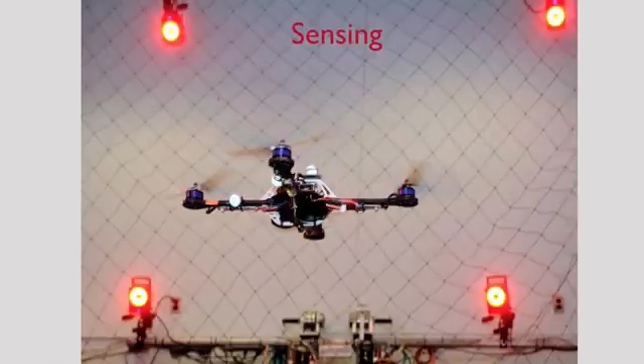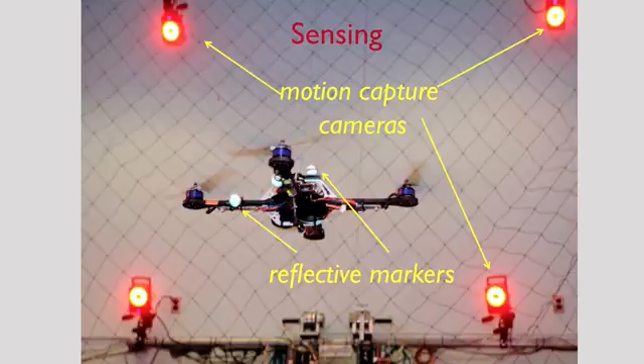In the lab, we have motion capture cameras that allow the robot to measure its position. Through reflective markers mounted on the robot, the cameras can estimate the position of each marker at speeds exceeding 100 to 200 times a second. These measurements are incredibly precise, with accuracies well below 1 millimeter.

If you go outdoors in general, you might not have GPS, or your estimates of position from GPS can be very inaccurate. This is especially true next to tall buildings. Indoors, it's hard to get GPS, and we'd like to operate both indoors and outdoors. Because these vehicles are small and maneuverable, they can find themselves in settings where it's very difficult to communicate directly with them. We also want these vehicles to move quickly and maneuver through complex environments.

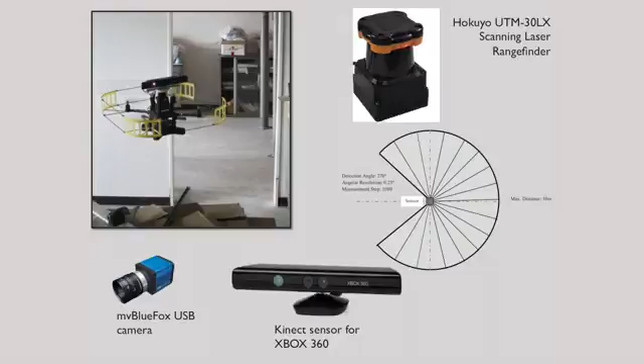How do we navigate without GPS, without external motion capture cameras, or any other external sensors? Imagine the vehicle is equipped with sensors such as cameras, color plus depth cameras, or laser range finders. These sensors allow the vehicle to infer information about the environment, and from this information, localize itself.

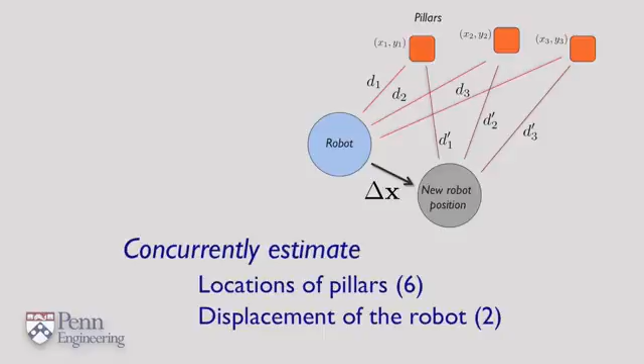If you think about it, you're trying to estimate 8 variables: 3 pairs of xy coordinates for the pillars, and delta x. This problem is referred to as simultaneous localization and mapping, or simply SLAM. The idea is you're trying to localize yourself, estimate delta x, while mapping the pillars x1, y1, x2, y2, and x3, y3.

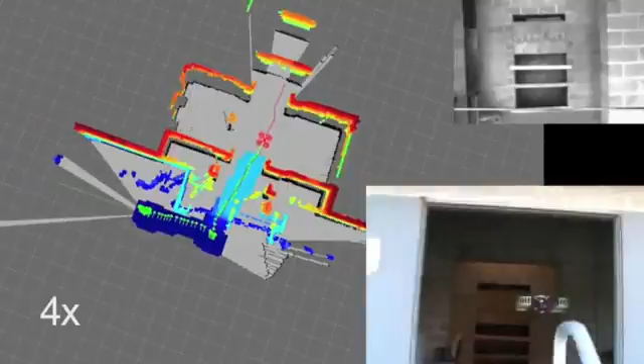In this video, you will see a robot entering a building it hasn't seen before. It uses the SLAM methodology to map the three-dimensional building while estimating its location relative to the features in the building. The map it's building is shown on the central screen. The blue colors are the ground floor and the red colors are the top floor. You will see intermediate points where the vehicle plans its trajectory.

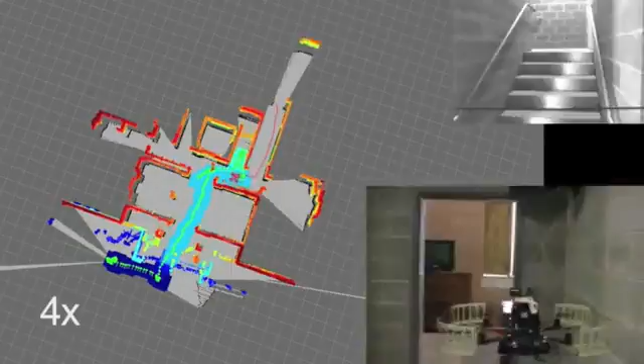If you look at the red snaking curve that emanates from the vehicle to goal points, these goal points have been designated by an operator viewing this map and tasking the vehicle. The vehicle does everything else. In other words, you can click and point your way through this building without entering it, while getting information about what's inside.

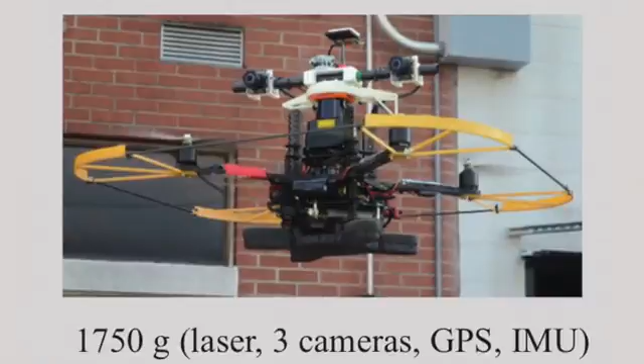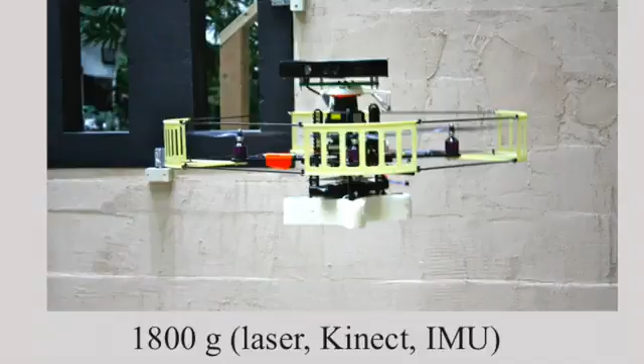On the top right, a smartphone drives the robot. On the bottom right, the vehicle is instrumented with an RGBD camera, red, green, blue, and depth camera, which you can now get as part of an Xbox video entertainment system. It also has a laser scanner on it.

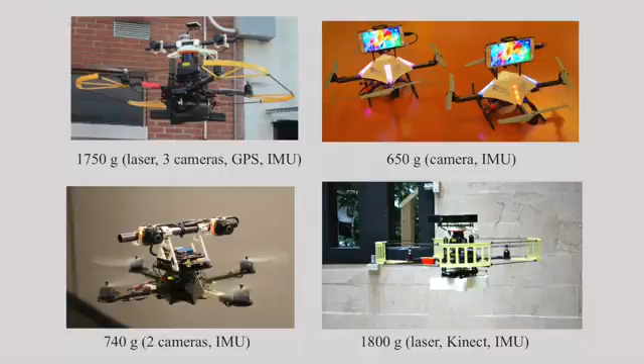You can see that each vehicle has a different mass and size, and the reason is very simple. As you put more hardware on the vehicle in terms of sensors and processors, the vehicle has to become bigger. To support this weight, you need bigger motors, and to support those motors, you need bigger props, which in turn requires bigger batteries.

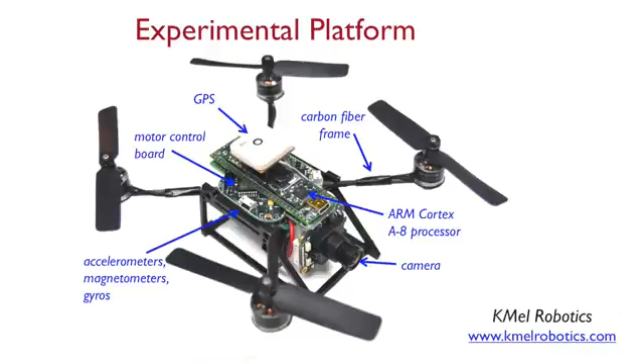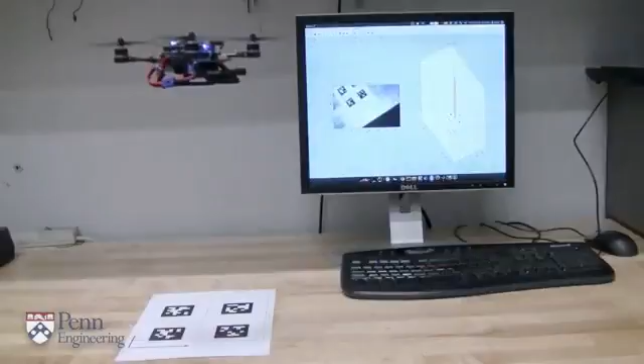Here's another vehicle we use for instruction in our classroom, and this vehicle just has a single camera and an IMU. Because it only has a single camera, we actually instrument the room with beacons. These are April tags, and as you'll see in this video, the vehicle is able to localize itself with respect to these beacons and hover.

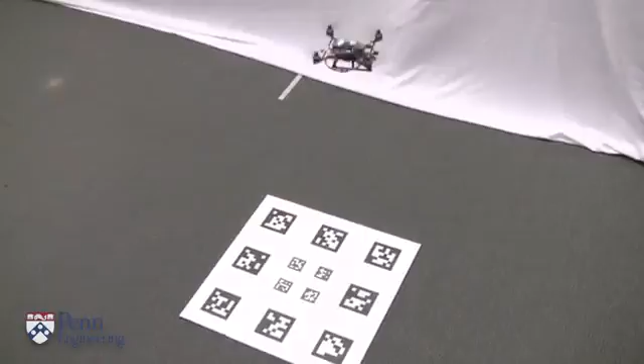So it's estimating its position and velocity relative to the beacon and hovering autonomously. You can switch between small markers and large markers, which allow the vehicle to control its height. And of course, if you have lots of these markers, you can navigate over larger distances.

In our laboratory, this is an inexpensive replacement to the motion capture camera system. Here, it's a single camera, off the shelf and inexpensive, but we instrument the environment with beacons. Because these beacons, the April tags you see on the carpet, are known to the robot, it's able to recognize them and estimate its position and orientation relative to the tags and therefore the environment.